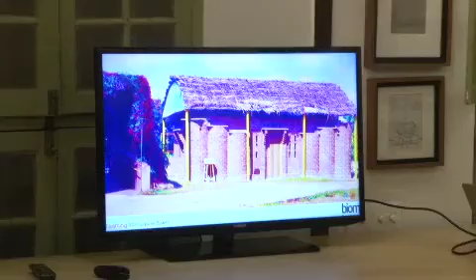This is in fact not a complete building. This is a wall made for a classroom at Spastic Society. And again, learning from Baker, thin walls turned around, which become storages. And this was a bus shelter which was turned into a classroom where children on wheelchairs could come and use it.

Furthermore, this was for ISKCON, again a small temple, a hexagon, but most of the time the rider is do it fast and do it cheap. Again, exposed brickwork here. We used the scaffolding of split bamboo and put ferrocement above it and left it. So the scaffolding remains and the rest of the walls are rat trap. So you can see a bit of it. And this is just a very nice picture.

But it's the first time we used solar panels. Solar panels were lighting up the temple, which is also accommodation, so people stayed in the night, as well as running the pump for an overhead tank. So this is a building which was done without electricity. This is about 25 years old, when we didn't have the concept of taking a generator to the place. So that's why you don't see railings in the staircase. Everything else is either ferrocement or brickwork and a bit of stone.

So more of, again, using Baker. I'm sure you all are aware of filler slab. It started becoming more of a fashion rather than what Baker talked about, frugality. It's very difficult. We wouldn't get the worst kind of tiles which Baker would get in Kerala, and the clients wouldn't like a tile with a crack. So we are using nice, good quality tiles.

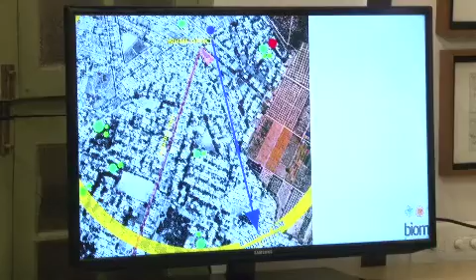So this is Biome's office. I think it's the blue circle. And around it, we have done about 50 homes. So there was a movement for some time for the area, called Vidyaranyapura, to be changed to Chitra Ranyapura.

That didn't happen. So it's like this. So Georgina, I do a house for her, then her brother's house, and then her friend's house. So this is a line of homes, the smallest being just 300 square feet, the largest being something like 600. So again, we're talking about lots of homes in Bangalore now, all over, north, south, east, west.

But now this is about 2008, where we're saying now it's Biome. So the name changed in 2008 from Chitra Vishwanath Architects, which was total lack of creativity in naming an office. In fact, when I started, first of all, we didn't make many drawings. In fact, our house, we didn't even have drawings. I didn't have time to do drawings.

But luckily, again, because of Bangalore, the very first month I had 5 homes to do. So I always had lots of work to do. So even when we were designing our house, I was also working on 22 more houses. So we always have this number. So that's why the house has very bad details. Certain details I wish I could change, but didn't have time.

But by 2008, we were working a lot on water. Vishwanath had left HUDCO and he was working on water. And we were also incorporating water a lot in our designs because we saw that as a huge scarcity in the city. And it's not enough to just design spaces, but look at how the building would live. So water, sanitation, energy, all of it started coming.

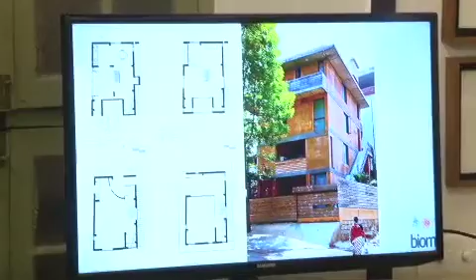So the big home that you see at the back belonged to their father. They were living with their parents and they wanted a space not so far away from home, but where they could do their work or just chill around. So we developed this plan for them. Both these homes are essentially bachelor pads with a loft. At the lower level you have the living space, a small kitchenette and a toilet, where you meet your friends, where you work. And on the upper level you had your sleeping spaces.

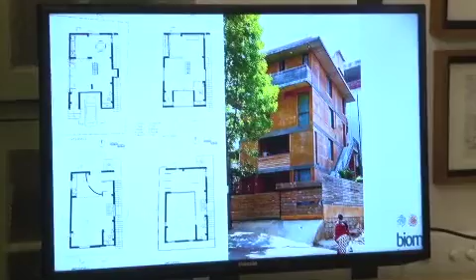So we chose to build this home with rammed earth. This was a conscious choice dictated by the site situation. In most of our projects, we dig a basement, you have some empty space next to your land, you make bricks there. Now, this is bang in the middle of the city where you don't have additional land. So we chose rammed earth because you could get earth from elsewhere in small quantities and use it, then get the next bit of earth.

So again here you see the loft here is built with steel, whereas the lower one is with concrete. We needed formwork, shuttering to make rammed earth, and it was quite an investment because this is really a small building. So what we did at the end was we used this back to build a floor.

And thankfully for us, this was a client who understood what we were talking about. So we do have rugged finishes, unfinished concrete slabs, a very limited palette of materials.

Talk a little louder or use this. Okay, sorry. Okay, don't use that. Yeah.

So the next project, it's called Hornbill House. It's a part of a larger project we designed, a set of 9 homes in Coonoor. Coonoor is in Tamil Nadu. This is a tea and coffee estate, so they were looking at putting up a hospitality facility. So we designed 9 villas for them, and Hornbill is one of them. They eventually built only 3, 2 of which were renovations. So this was the only new building which came up.

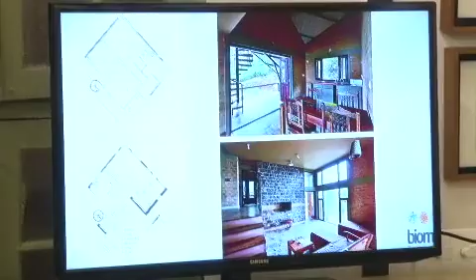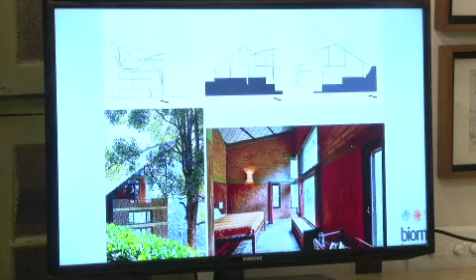Again, we chose the outer walls of stone because it was sitting next to a rock outcrop, so it's a composite wall. The inner walls are of mud bricks. The soil was from the land; when they fixed their roads, they got this soil. So that's about it. These are different views of this house. That's the living space. And the bathrooms overlooking the waterfall. When the picture was taken, there was no water there. And that's a night shot.

There's this interesting thing: it hugs a jackfruit tree. And when there are ripe jackfruit, bears come. So you can almost sit inside the room and see a bear eating. Yeah, bears and elephants. It's the last property, and after that is a reserve forest, so you have wildlife coming in often.

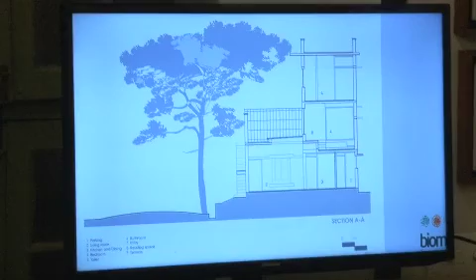So that becomes your primary source of light and ventilation, and then we closed out the neighbors. So this is what we have eventually. One of the things we drew is this way of wall building. This is mostly compound walls which are built in the villages around Bangalore. Slabs of granite just put vertically into the ground, and with time, when the needs go higher, they add a roof onto it and start using it.

So this client had one more thing in his brief: I don't want tiles in my bathroom. So how do you build an earth wall and not have tiles? Also, an architect, Shankar Kanade, the Kanade brothers, used to use this technique a lot in Bangalore. So we referred to that, and all the toilet walls are predominantly stone slabs standing vertical in steel sections. I'll show you the finished pictures, but that's what we have.

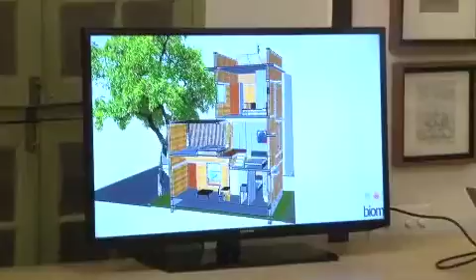The cross section steps up. On the lower level is the living and kitchen, and this huge skylight affords that you're below the canopy when you're in the living room or you're working in the kitchen, and you have a guest bedroom there and the primary bedroom, which opens to a closed court. Now this again is a small courtyard we managed in a modern house.

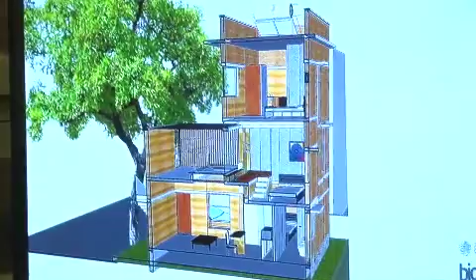This is a very young couple who also entertain a lot. So they had also this ask that when our friends come over, we don't want them to come in through the house where our parents are, but rather have them come up directly to the roof. So we added this staircase in the front, which through this gate allows them into this courtyard. At other times, the courtyard is connected to the bedroom, so they can step out and read a book.

The room at the top is a home office for Arvind. At one point, Priya said, now Arvind has his own space, I want mine. So then how do we fit this in? We eventually figured out she just wants to read, so we gave her an elevated seat here. So we managed that. But again, if you observe the cross section of the house, it varies a lot. Now this was determined by the height of the stone slabs that we get. So we managed to fit it into the use of the house.

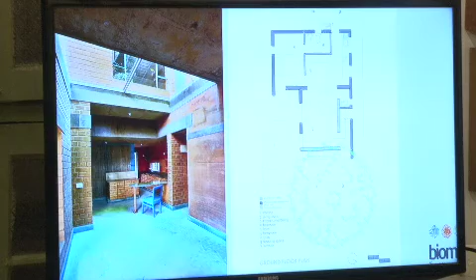So that's the living room. Of course, it's without the furniture. And that's what you see from the kitchen when you're working in the kitchen. You go up, that's the living room with Priya's seat and the courtyard across. And that's the stone wall for the toilets. The courtyard in the front. So we closed it, the neighbors can't see what's happening in here. And that's the staircase which leads to Arvind's space.

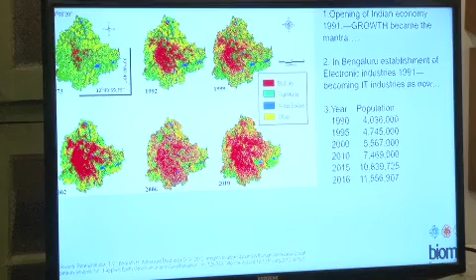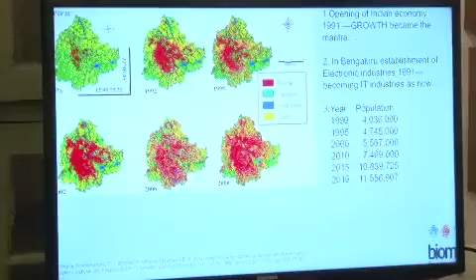So now this question of why, why do we do things the way we do? So to sort of tell you the context that we work in. That's Bangalore city from 1990 to 2016. You can see the population has almost gone up 3 times. And you can also see the change in land use. The red was the built up and the green was the vegetation. Now there's very little green left. So this is the context we work in.

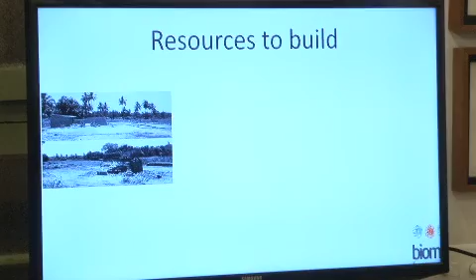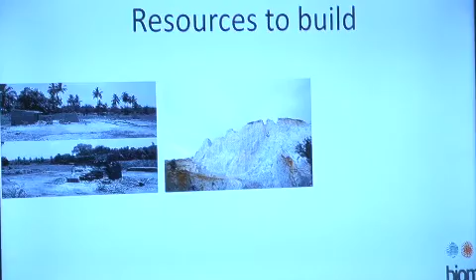So the graphic says the same in numbers. What a growing city like this needs is resources. Resources to build, resources to exist, survive, which is your food and water and electricity. And then it produces waste streams. So we work within this stream, and our work tries to address these issues. That's our natural heritage. We have lots of these granite hills on the outskirts. We're quarrying them for concrete. A lot of our material comes from China, wood from Canada, Australia, and other places.

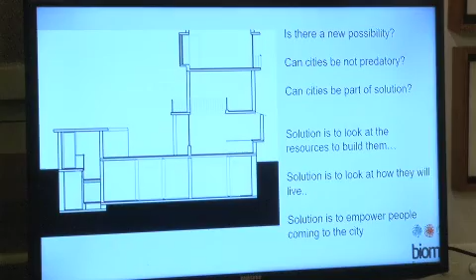So we asked this question, is there another way of doing this? Can we look at the city, the site, or the locality as your quarry? So most of our buildings have a basement space. We work with the owners of the house to see how the basement can fit into their needs. And like Chitra said in the beginning, sometimes you design large basements. There are sites where a basement is not possible for various reasons.

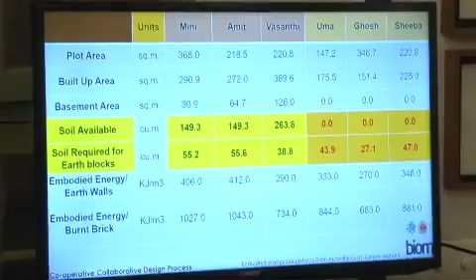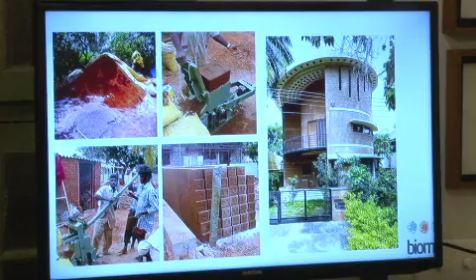So you can adopt a collaborative approach between two house owners, because we do so many homes. You can design a large basement for one, and that can provide the earth for another home nearby. So most of the time, from one basement you can build 3 homes. So one is that very home plus 2 others. So we're kind of saying that now you share the DNA.

You're not only sharing a material, but in a larger scale of things, the city is now connected by the material it has used, so it doesn't become just a material. It has more association with it.

Because in our own house, we did a mistake in calculation. So we had to get soil from elsewhere, and that soil is a very different color from the rest of the house. It's very nice to say, oh yeah, this came from that part of Bangalore. This was that project one was doing. So I like that whole emotional connect with the soil.

Right. So yeah, we make a basement, we make bricks, and our later buildings are also using rammed earth, adobe, cob. So mostly the earth is quite unlike here. It has about 40% clay, and we use quarry dust, so we can reduce the amount of clay, which should be about 14%, and we make earth blocks at site.

So this is how the basement is built. So you get a space like this. These days, most of our basements have skylights, gardens with them, so it's better lit, better ventilated. You also don't feel that you're underground. And yeah, like we said, houses which don't have basements, you associate it with another project and you get your material. So you want to go through this one? Yeah.

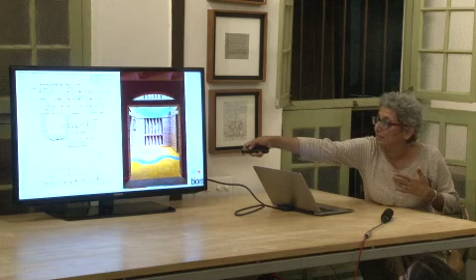So here we enter at this level. You can see the blue beginning. Over here we enter and you come down a ramp and you can come down some steps too. So this is all accessible school, totally accessible. You can climb up also by a ramp alone. And that's a section, here it shows you the surrounding heights and then how we went down.

So the classrooms, this was for kindergarten up till 4th standard. Instead of using a beam, we used a large arch so that the teachers can only move in a certain area, and the children have ability to use the space much more than the teacher has. So it's giving the space to the children rather than to the teachers, because at this area, the teachers can't move.

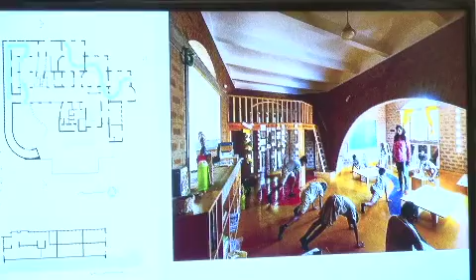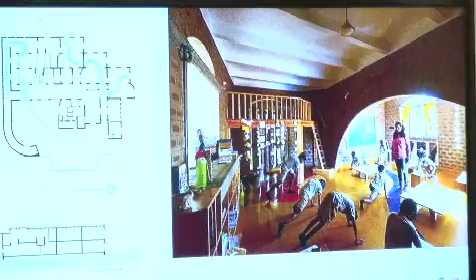Also, children are sitting on the floor and studying, so we made jalis at the lower level with mosquito mesh for the air to move on the body, and the upper level is glass, so that light comes further inside. The different ways of using the skylights: because it's quite hot, you couldn't put large pieces of glass, but small glass and a lot of shade, play of shade and light.

I think I'll go for this one. It's quite hot in Coimbatore, so you can't play outside. So we created the whole play space inside the school itself. The children climb up the slide and go to the first floor. The passages are these. So all over the place there are a lot of play areas. So this was all about basement.

In fact, sorry, the roof here is also arch panels made of earth blocks. So we are also nowadays looking at how few different types of materials we use at the site.

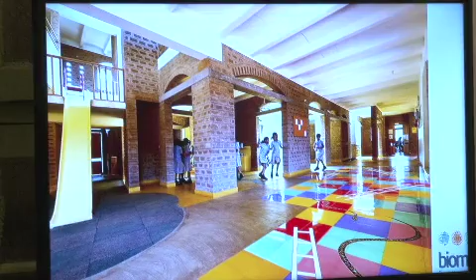So we use as much as possible earth for mortar in the foundation, earth for, in fact, also the PCC is a stabilized PCC, so that's also a lot of earth there. Then you take the mortar, then you make the blocks, you make the roofs. The foundation itself sometimes is rammed earth. So just use the same material as much as possible so that we reduce the waste which would happen.

And precasting helps a lot, because by the time we reach the roof level, the roof is ready, and you just place them and do a little amount of casting, and you can continue the rest. So we were talking mostly now about basement. We never talk of the middle. Middle space is like everywhere else.

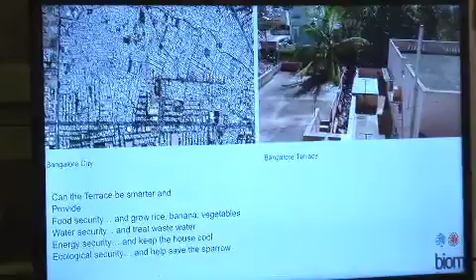I'm just too fond of basements. I want to keep digging as much as possible. And India, we don't use the underground enough at all. Everywhere I go, so many things we could have gone underground, and we're still using all of the ground. And the other space which we don't use is our terrace. I think not in Pune, yeah, you guys do a lot, but not in Bangalore like this.

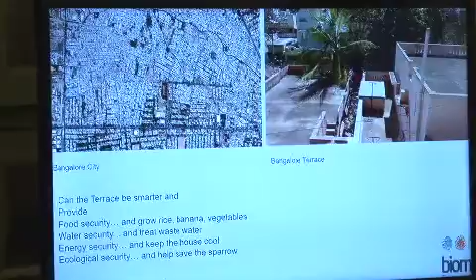So that's the Google screenshot of a terrace, and this is a terrace in Bangalore. And we don't make papad, we don't dry anything in Bangalore. It's only 3 months that we have some kind of sun, so we don't use the terrace at all. But can the terrace be smart? Can it do so much more? Can it provide for living? And that's how we look at the terraces.

And we design the terraces now for something called lifeline water. So your drinking and cooking requirement for the whole year, for the family, is from the rain which is falling on your terrace. So you don't depend on Kaveri, you don't have to fight with the Tamilians or anybody, you have your own water. And similarly use it for treating the wastewater, because it's all small plots. And terrace is where you get the largest amount of sun. And to treat the wastewater, you need the sun. So it's on the terrace.

Terrace for growing rice. Vishwanath got himself a Mercedes-Benz of a cycle from Angela Merkel as prize, for the idea called rice on the roof. What is it? Growing rice on the roof. Yeah. And then you have a small toilet, and you use the resources which you otherwise call waste, and use it again on the terrace. And then once you create such an ecosystem, you have biodiversity.

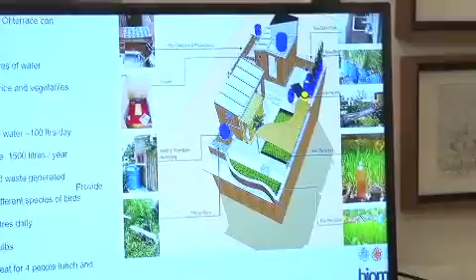Sorry? This is on the roof. So that one there, the second picture. Toilet is also on the roof. That one is a dry toilet. It's a composting toilet. So collect both urine and feces. And this is urine used as fertilizer. Yeah, we have a loo below. Is that part of it? Yes. That's the rice field. That's the fertilizer factory for the rice field. So it's not a toilet, it's a fertilizer factory. It's on the roof, yeah.

And it's also called urine diverting dry toilet, UDDT. So liquids and solids are separated. You use the urine diluted as fertilizer. The solids go into those blue drums, get composted on the rooftop, and you grow stuff in those drums. So you grow trees now. We have lemon, the sharifa and everything.

So this is our house. So our house is a workshop. It's not this lovely space architects make and you go there and do pranam. No. We keep altering, we keep tinkering a lot with our own house because that's what you can do. Where else would you grow rice? Till we do that, and now the clients are doing all sorts of stuff.

So here is the rice growing, rice being harvested, and this is the treatment of wastewater on the terrace. All the grey water is treated, used for the plants on the terrace and ground, and for flushing below. There is a conventional toilet below because that came first. The dry toilet came later in the age of our house. Things have been added, so dry toilet came much later.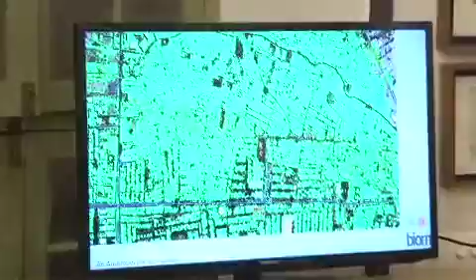So we make the interns do this. We're talking about the city becoming a productive space, of creating a total ecosystem. So the last intervention. One of the things with urban design and urban forms is that typically cities are designed on a transport model. That's about the only driving force. Residents, transport, employment, access, education, and how do you minimize all that? We tend to argue now that cities should also design themselves on the natural resource availability and the wastewater streams they generate.

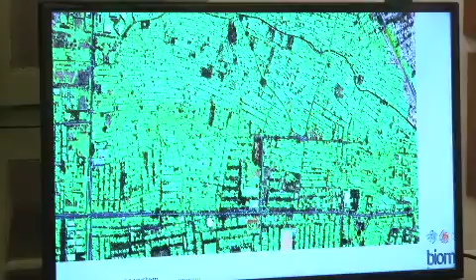So what this experiment leads us to is that every individual in the city should have a right to 40 square meters. And we should imagine our neighborhoods and our cities with that 40 square meters by which you can become energy sufficient, water sufficient, food sufficient, and waste sufficient. So can we start to influence larger design norms of planning, moving from architecture, from the small to the big, is one way that we do.

We will be talking about a larger project where they had worked on water issues. So, sorry? Yeah.

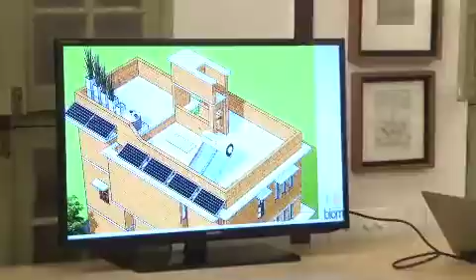So this is now part of the design. You have to design the terrace as to where one will put the wastewater treatment system, because that water should not fall into the space where you're harvesting the rainwater. Where would you put the solar panels? Where would you grow anything if you need to? And where would you put the lifeline water?

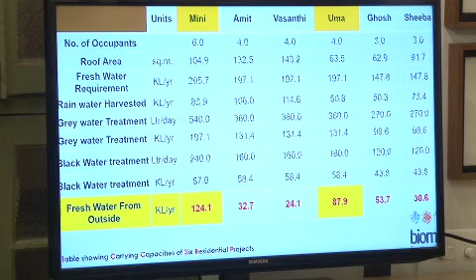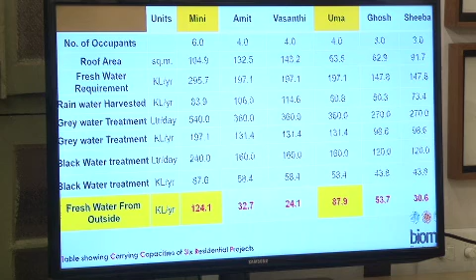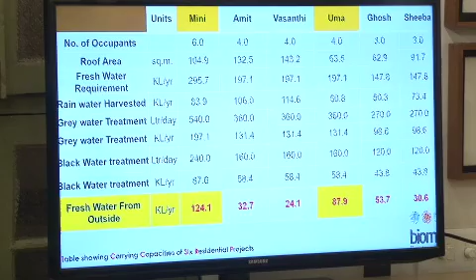So this whole idea is that what you're working at becomes the research, and you start looking at what you've done, say about 6-7 houses, and see what's happening. Here it's about water, and you start noticing that in homes where the number of occupants relative to roof area is lesser, there is more water available. So this becomes a yardstick we use when people ask about high rises. High rises then are very, very parasitic, because they really can't provide even the drinking water needs

of the populace below. So why don't we start thinking in terms of how much roof area we should be providing so that we can be self-sufficient, at least in terms of water, because at least in Bangalore it's one of the most expensive water which comes into the city.

So we did our 6 homes, the same homes we studied for resources to build with, the same homes in terms of water. And if they do the grey water treatment, black water treatment, how much water do they really need from outside, and how can we reduce it? So this leads us to another project. The clients call it Eco House.

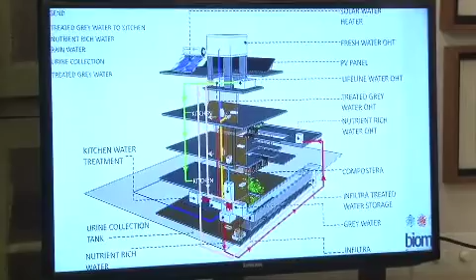And this house is all designed in terms of the waste it would generate and how the waste would be converted, would be a resource to be converted into food. So in fact, the whole house was designed from the back. It looked at all the pipelines, how all the toilets would be placed, how each different waste would be connected to different systems of reuse.

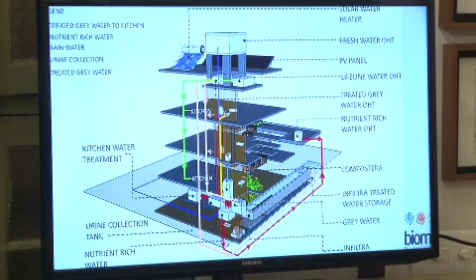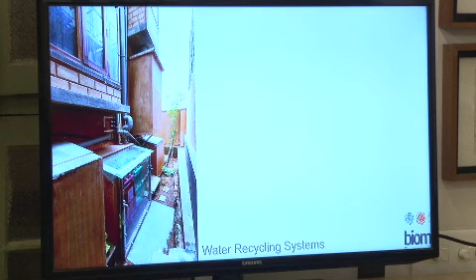And the professor comes from Stockholm Environmental Institute. He was very keen that this should happen, and we designed the whole house in this term. But it takes very little space. At the back, it's taking just about a meter. It's not that it's going to take a lot of space. It takes a meter because of all the walls, and then you can arrange everything. And the rest of the house can be a very good architectural feature.

So all the toilets are at one side. You take all the waste, and then you have a huge basement which gives the earth to build with. And then you get a large terrace, and the terrace becomes the new ground, because you do such good concreting, which can do so much. And if you have a good slope, it's just a new earth where you can now put the modified soil from your waste and create a garden and get all your food.

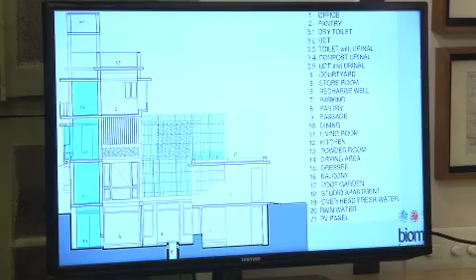So the green part becomes where he grows all the vegetables and other things. I don't know what else he is growing. Is this the basement? No, this is not the basement. So here, we made a grid where the plants would also grow on top. So that's the house. That's the terrace, which would have more plants now.

So this is the mezzanine. That's the penthouse as a house on top, and that's the way the house looks.

We'll talk about this. Yeah. No, you said that I'll use this.

Okay. So this is a project we did for ISKCON at a place called Wada. This is 100 kilometers north of Mumbai. I think it's 75 acres of farmland in which they wanted a retreat for their devotees. So that's Mumbai, and that's where the land is. So it's on the foothills of the Sahyadri, and there's a river called the Vaitarna which flows. So it's in between that.

So how it began, they wanted to build with earth, but they themselves were not confident. So it's a large group, some saying yes, some saying no, it works, it does not work. So the first engagement we got with them was to build an earth wall. We were not so busy at that time, we took it up. One of my colleagues went there, he stayed for a couple of weeks, and he built 4 earth walls. Rammed earth walls, yes. So again, stabilized, unstabilized, different mixes.

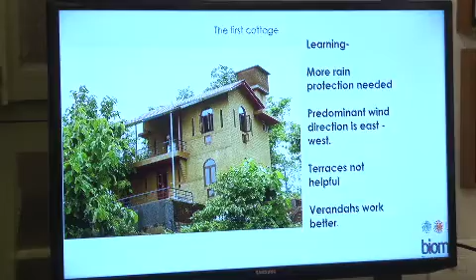So once that stage was crossed over, they had not told us there's a larger project. They said there might be some other things. So we had some people move on to this side, but there were still some other naysayers. So what they wanted was for us to build one small cottage. So this is, I think, a 700-800 square feet cottage that we built for them. It was a 3 or 4 month project for which we sent workers from Bangalore. So they watched this through the rain. Once they were confident that this can happen, they offered us a larger project.

But what this gave us, because this was a 3-4 year engagement, dialogues, building a wall, them coming to Bangalore, us doing these things for them, and building this cottage, we learned how the place works, how the climate works, how comfortable it is, what works, what does not. So we sort of got these pointers after having built this one.

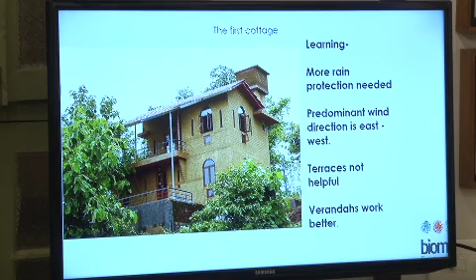So we had these strategies. The land use was driven by how water works in this land. This primarily works on groundwater. It's a farmland, but the primary source of water was bore wells. The location was such that whatever water falls, it moves through the land to the river, so there's very little which actually stays on the land.

So we commissioned a hydrogeological study, which is a study to understand what happens below your ground. The findings showed that on your site there are recharge zones, there are discharge zones; you can hold water here, and the water will come out there. So those were the driving factors, and with that study, we had these as our markers for how we work on the land.

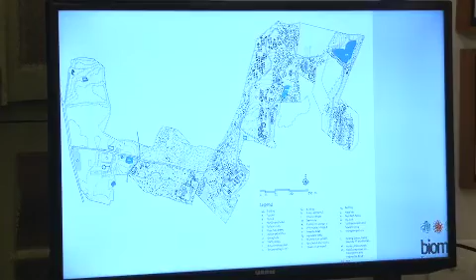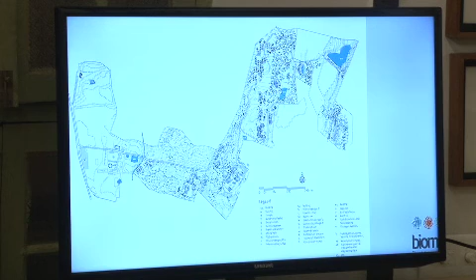So this is what the hydrogeological study did. It said that you store and hold water which comes from the Sahyadris, and over here it will come out in the wells. So based on that, we first decided where the water structures are going to be. We decided to put our buildings on the higher elevations of the land. These were our drainages, so they stayed unobstructed. They could continue to do agriculture, and our buildings themselves were very little here.

So the existing land use, there was very little change in the land use. Sorry, this is a repeat.

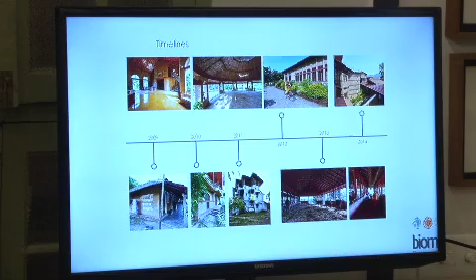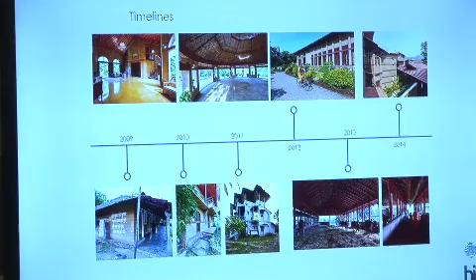So these were the different buildings. I think the engagement started in 2009. The last building we finished for them was in 2014, and I think we'll be doing a couple more this year. So it's been a constant process of learning what works and what does not work, in materials, water strategies, and techniques. And also for them, they now look at buildings differently.

They also didn't know what it would be. Now it's become a hospitality space. It was a retreat, but a lot of people from Mumbai go there, and now the demands are changing because the Mumbaikars want something else. So they are also evolving in how they engage with people from outside.

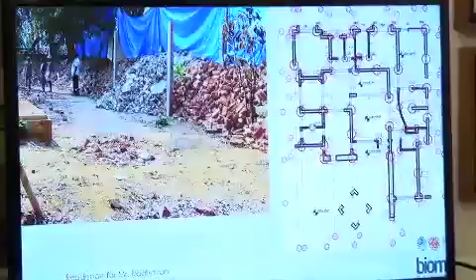And what was nice was here we did an SBT water treatment system, called Soil Biotechnology, which came from the Indian Institute of Technology, Mumbai. They're so happy with it that they keep adding to it. So there is now water even during the dry days because you have people coming. You start looking at people coming as a resource, and we made this large tank which gives them the water from the treatment system, and there is a well, so they get a lot more water available.

So for us, we see that development can also be positive. Ideal would be that it remains a forest. It wasn't a forest, it was a teak plantation, though by the time they got the land, all the trees were cut by the previous owners. So we got a very dry area, but now it's much greener, with a lot more water available, and more people come.

And we started looking at the whole water and what are you doing about it, is this enough? So we have now told them that only 80 more people can come and stay here on this much land. You can't build any more and you cannot stress your water. And they've accepted. So 40 more rooms are coming up, not anything more than that. It's a very interesting engagement. Things keep changing, but it's interesting.

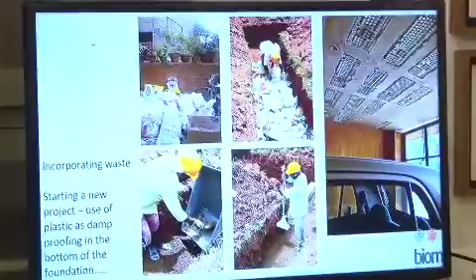So the next bit we've been wondering, we've been asking this question: can our buildings work as waste sinks? So these are some of the early attempts we did: collecting plastic, which is strewn around, putting it in foundations, so it stays there as long as the building stays. Filler slabs out of discarded keyboards.

So then there is this project we did a few years back for Mr. Raghavan, a gentleman in his 70s. He had 2 daughters and an inherited home which was built over time, added as they could afford it. So it had issues: light, ventilation, structural cracks. He wanted to leave 2 homes for his daughters, but he also looked at whatever's in the house as a resource. So he asked us, can we use most of it back in this building?

Luckily for us, this was a large plot of land where you could take down the building and hold the material till you could put it back. Things like stone and wood are fairly easy. You take it, you use it back here. So this is the house and how the plan was. You had wooden roofs, Madras terrace roofs from where you have wood, old doors, windows. So we came up with this new plan, with a large area of the plot to be left empty to be a garden later.

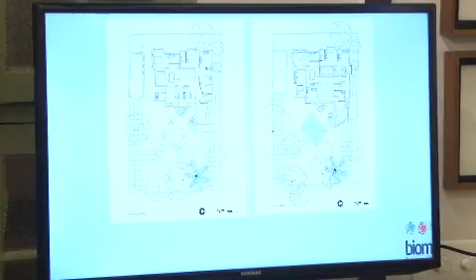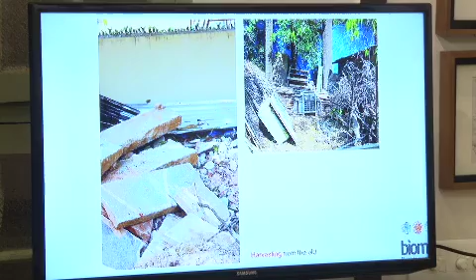So we started taking the house down. Just like you segregate waste at home, you don't demolish the house, but you dismantle it into different components: brick, concrete, flooring aggregate, and so on. These are the easier parts: stone and wood and steel. Then you process it. This was one of the early projects. We did look at machines, but it was too expensive and the space was not enough, so it was all done manually. All the concrete was broken down into smaller chunks to be used back as aggregate.

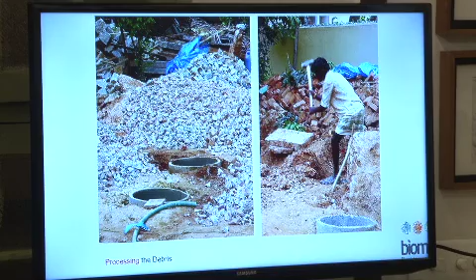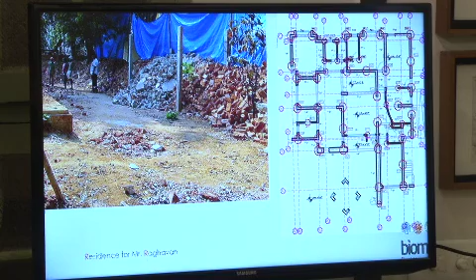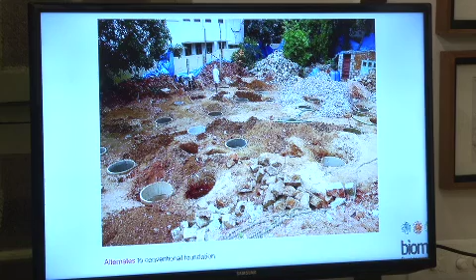In this drawing, we had a peculiar situation. Once we started digging, we discovered that this area was probably an old lake bed. It was very soft soil; the more you dig, the softer it gets, like soap. Thankfully, we had engineers who could give us alternates in foundations, not just concrete. What was proposed here was a dug pile. We made 42 wells into which you fill new concrete made out of the old processed concrete debris. Once that's done, add a grade beam, and that's it. All the concrete waste went under the ground.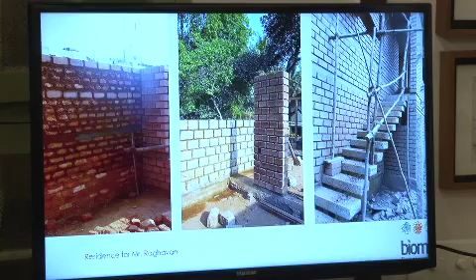The old foundation, which was stone on a sand bed, was used to build the walls. We needed more walls, so we used the bricks, and for the rest we made earth bricks. The old plinth beam, which was of stone, became the new staircase. This was something we had to design on the go, because it was the first time we did it. We didn't know what we would get next and how to use it. So that's the new house. The old stone foundation is now the stone wall. The beams are now the windows.

So we had two houses, one for each daughter, on each floor. So that was his safety grill for the front door, which is now your skylight grill. That's the lower house.

This is yet another new project. So what we learned from there is that your building can now be a resource for new materials. This is a new project where we designed the building so that it can be taken apart after a few years, but all the materials can be reused.

The client had taken the land on a 5-year lease. It's not that he asked us whether the building could be dismantled later; he had no idea such a thing could happen. So when he came, we said, yeah, we should work out something that you can take away, because you're putting in so much money. And in an ecological framework, economy is a very important factor too. Why leave it just like that?

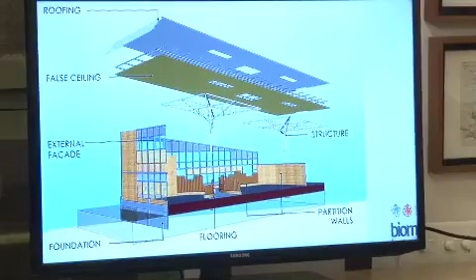So we told him that we'd work on a design where the whole building can be transported at any time, but it's not on wheels. It could be removed. So we looked at each component of it. Even the foundation, he can dig up and take away. It's again the stone slabs. The only thing he may leave is a little bit of concrete at the place, but everything else he can take away: the stone slabs, the walls, the support system, roofs, everything.

So this was based on something called the Reggio Emilia philosophy. It was just fun doing the design, because it required creating a community of classrooms, not just classrooms. Like creating a city, so the classrooms open into a piazza.

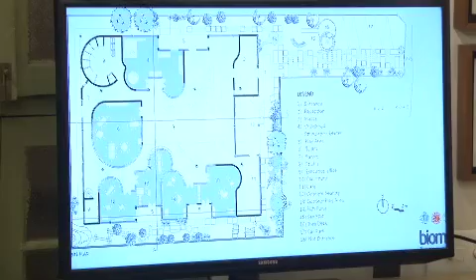Reggio Emilia are two villages in Italy, and after the World War the mothers decided that their children needed education in a different manner, letting the community teach rather than some school or teachers whom they employ. So it's based on that philosophy. Each classroom has to open into a plaza, a piazza, and other spaces.

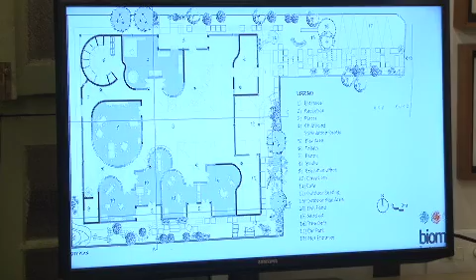We used curved walls because the walls were not taking load. So there was a big difference. I'm sorry, we'll go to this one first. So we asked, how would the roof be supported? And we took the image of a tree, with the children studying under the tree. So we made this model with something like 20 tree columns, which the structural engineer reduced to just 8.

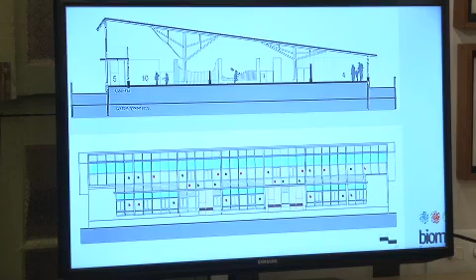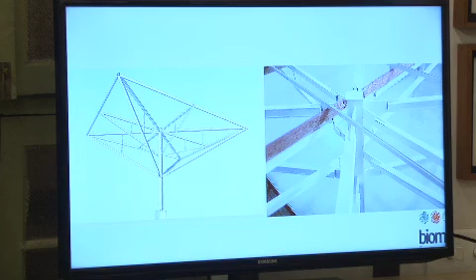The facade is designed to breathe, to bring in light, and also to create privacy. That's the model. The structural engineer came up with this column, which at different levels reduces the spans. We had to make a model for the contractor to understand how this column would work.

That's the school. We used paver blocks for the flooring, so they can remove the floor too, and below it is just quarry dust, so they can take the quarry dust also. That's how it is inside.

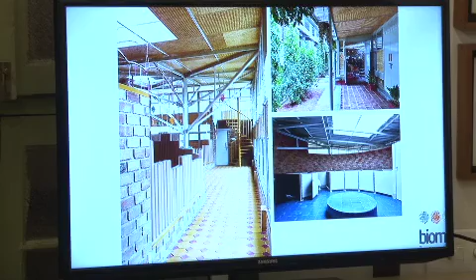This is the toilet. It's a circular toilet where all the pipelines come into this circular space, the chamber inside the toilet. So if anything happens, you can repair it, and you use this as a little raised space where you can get the kid up there if you need to clean or change the dress, or the ayahs or the children can wait.

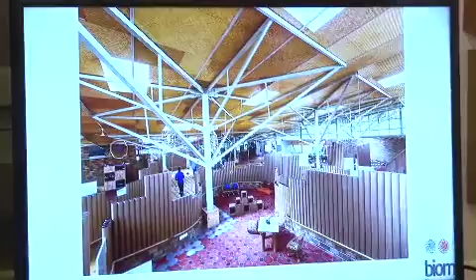Some of the walls are of paper rolls. It was just a trial. The clients didn't know about it, we didn't know about it either, but we had to learn. So it's also important that you try some things, but you work out the details so that it will last. It also helps in terms of sound, because it's a very large space with one roof. It provides sound insulation.

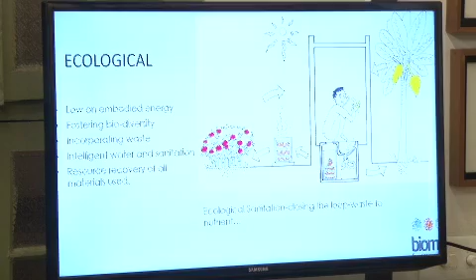Mud buildings, for example, how do we make sure that earth buildings get a property tax break? Is it necessary? Should it not be done so that more use of earth from the site itself goes around? So we look at legal frameworks, and finally groundwater, the framework for managing groundwater, which is completely missing. It's a sort of private resource which anybody can take. How do we push it to become a common pool resource? So that's some of the thinking that we do.

Yeah, this is a favorite cartoon. I don't know how many times it comes.

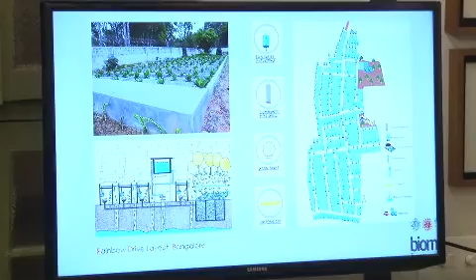So one of the examples for that was this particular gated community of 360 plots or sites, which is on the periphery of the city, which is not connected to the city utility. So there are 360 plots. What happens then is that every one of the plot owners would drill a borewell for their water requirement, every one of them. And the average depth of the borewell in this part is about 1,000 feet. So you spend 2 lakh rupees minimum to drill for water.

So you can imagine, here's a small can of water, there are 360 straws slipping in, and each competing with the other to become deeper, and each therefore destroying the other's effort. So that's water, groundwater as a private resource. How do we push it to a common pool resource? We were lucky to work with the association and persuade them, and let them know the feeling.

So what they did was they banned private borewells. The association did that, and they sank 3 borewells and said that that water would be equally distributed to everybody. But then the flip side was that all 360 had to intervene to recharge the aquifer. You flipped it around now, 360 straws putting water into the can and only 3 straws drawing it.

So we did a bit of modeling, and we figured out that even with those good works being done, if people were consuming at 270 liters per capita per day, it would still not be enough. So they had to get down their consumption to about 130 liters. How would they do that? So the community decided to price water at such a price that if you consume more than 20,000 liters a month, you would pay an enormously high price. You would pay 120 rupees a kiloliter. In 1 month, demand fell by 50%.

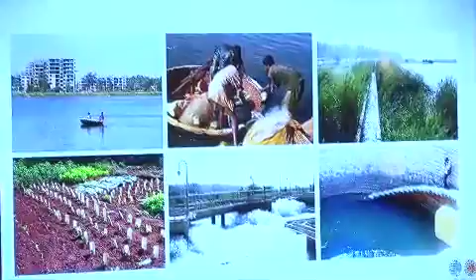A sewage treatment plant run by the city does not work because it's a cost center. You're spending money all the time to treat sewage. But if you look at the bigger ecosystem, the fish can pay for the sewage treatment plant. The big challenge is, can you pay the electricity bill through fish? And that ecosystem approach is missing because we don't have the right institutions.

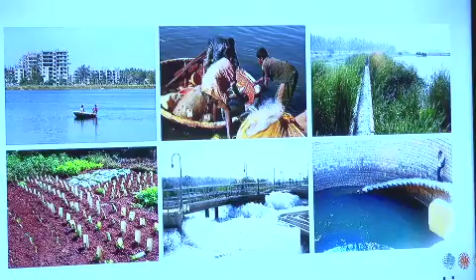And as you see, livelihoods can be fostered, groundwater can be recharged, lakes can be revived, wastewater can be treated, and the city gets water from these wells, for example, at 75 paisa per 1,000 liters, as opposed to 82 rupees which the city otherwise pays to bring water from the river Kaveri, which is 100 kilometers away. Embodied energy is less. Economies of scale are immensely different, and ecology actually makes a heck of a lot of economic sense. And the only barrier is the institutional and governance barrier. So that's the bigger challenge we work on.

That's treated wastewater coming into a constructed wetland, which is the biodiversity spot for the lake. So this is some of the work that the trust does in conjunction with the solutions, Biome Solutions. So these are sort of parallel projects.